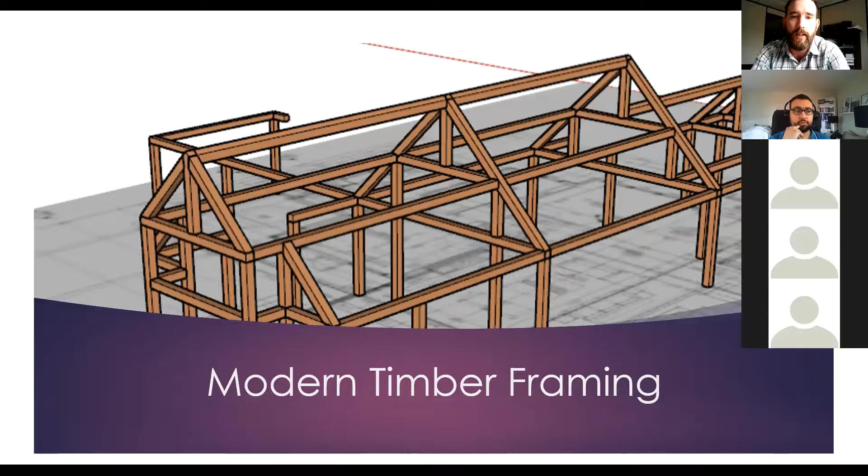I think wood is the material of the future. It was the material of the past, and it's going to come back for sure. Well, and it already has, which I'm sure you've studied a lot about. So here's one kind of an example project.

May I just add something? I was listening to one of the podcasts that is based from the US, and they were saying that part of the reason why the wood industry, one of the things hindering it, is the main manufacturers are based in BC in Canada, but I think they're starting a big manufacturing facility in Texas. So if that happens, the wood construction industry will probably grow in the US, which will eventually also kind of force the rest of Canada to embrace that change as well.

But anyhow, go ahead. Yeah, so definitely BC, that's where the big market is in Canada right now. They have all the trees. We're starting to see it come a little bit into Ontario. They just built a mass timber facility in Collingwood, I think it is. And then there's a couple in Quebec as well, because they're close to the forest. I think Eastern Ontario, Ottawa, Kingston, Cornwall, that region, we're prime because we're kind of right in the middle of the forest and the manufacturers.

So part of my goal is every project I get, I ask, hey, do you want to do mass timber? And most people say no because they don't know how much it's going to cost. But I am advocating for it in the area, and I'm starting to get people interested.

So on to traditional timber framing. I'm pretty lucky, there's a manufacturer in Brockville called Gibson's Timber Frame, and they do traditional timber framing. Everything's hand cut, mortise and tenon, and it creates really nice aesthetics. This area is still pretty rural, so there's a lot of people with cottages and high-end cottages. It's kind of like the Muskokas is all sold out, so people are starting to come here from Toronto, and this is definitely a bit of a premium product, but it's super nice as well.

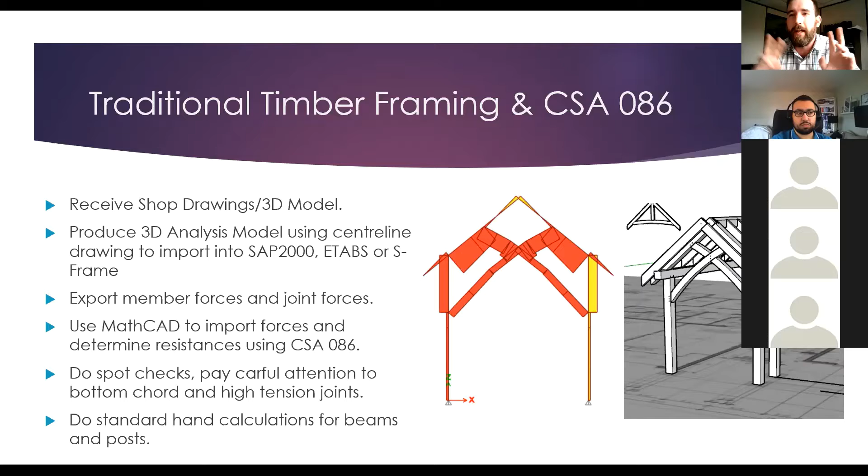And like all good engineers, I don't just blindly rely on any structural modeling I do. I definitely do some hand calcs as well, always doing a couple spot checks here and there, making sure it makes sense. If it's something simple like a post and beam, I'll just hand calc it and simply support it or something like that. By hand calculation, I mean I'm just typing it in MathCAD.

So here's a MathCAD sheet. I can't really do a show of hands, but is everybody familiar with MathCAD? I guess your professor used it a little bit, I think.

Anyway, my favorite thing about MathCAD is you can multiply like inches times centimeters and meters times feet, and it doesn't care. The units stay consistent. So you'll see my sheets switching back and forth from units all the time. I don't even know conversion factors anymore, and if a contractor gives me drawings in inches and I'd rather work in metric, it doesn't bother me. So I found a huge efficiency just not having to go back and forth with units, which you could probably imagine from an exam, that's definitely time consuming.

Also, you can copy and paste all your previous equations. This is kind of a snippet of one - I have a timber framing MathCAD sheet that every new project I get, I just pretty much copy and paste that sheet, which allows me to not have to retype out everything. So you probably recognize some of those equations.

Anyway, there's also a free version as well. If you haven't tried it, I definitely highly suggest you do try it, especially when you get into the workforce and need to make calculation briefs or something like that to get to your boss. This just keeps it all organized. They don't have to read your bad handwriting, and if there's a mistake, you don't have to rewrite everything out, you can just go back to the sheet and fix it.

So when I first got into this, I think it was because I'd rather work in metric, because that's kind of what you're taught in school. But my boss was all imperial, and it was just super frustrating going back and forth with him, because he didn't know what an MPA was and I didn't know what a PSI was. So I found this and I was like, yeah, of course there's a better way to do it. That's kind of how I came across MathCAD.

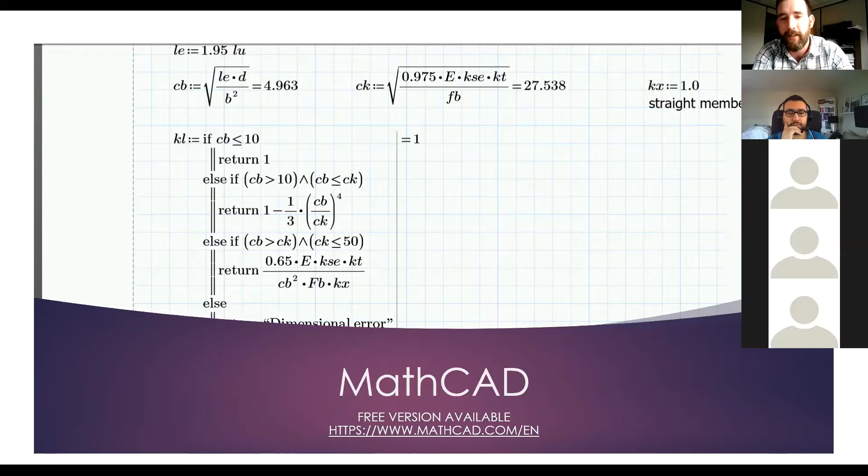So it's a great tool to use, and it produces great hand calcs as well. I wouldn't suggest getting into it if you're still in school, because like I said, I don't remember any of the conversion factors anymore. And if you're in the middle of an exam, you kind of need to remember those to do it fast, and I can't remember how to use my calculator anymore. So just be wary of that, it's definitely a post-school thing, I think.

So some of the interesting things, in school you don't really get into building code stuff too much. But the great thing about getting into timber framing as a structural engineer is it has to be engineered. In the building code, there's Part 9 for small buildings and then everything else. Small buildings are houses and buildings under 600 square meters, less than 3 stories, and these can be designed by a BCIN person, like an architectural designer. Now they're super limited in what they can do - they can only do 8-inch concrete foundation walls on 24-inch strip footings, and they can't have openings greater than 4 feet, this kind of stuff.

So what happens is if they have anything outside of their prescriptive requirements of Part 9, then they have to get an engineer involved. The nice thing about traditional timber framing is it's all post and beam style construction, so there's no light frame shear walls or anything like that. Anything with the post and beam style is not in Part 9, so then it has to be designed by an engineer.

So if this is something that interests you, it's a great industry to get into, and not a lot of engineers do it. I wouldn't call myself an expert in wood, but I get a lot of clients saying like, I guess I was working with my regular engineer and they don't know enough about wood to be able to design a truss, for example. And I'll tell them, yeah, I do that all the time. So that's great - I actually end up getting a lot of clients from other engineers because they're just not confident in wood, even though it's such an awesome, simple material.

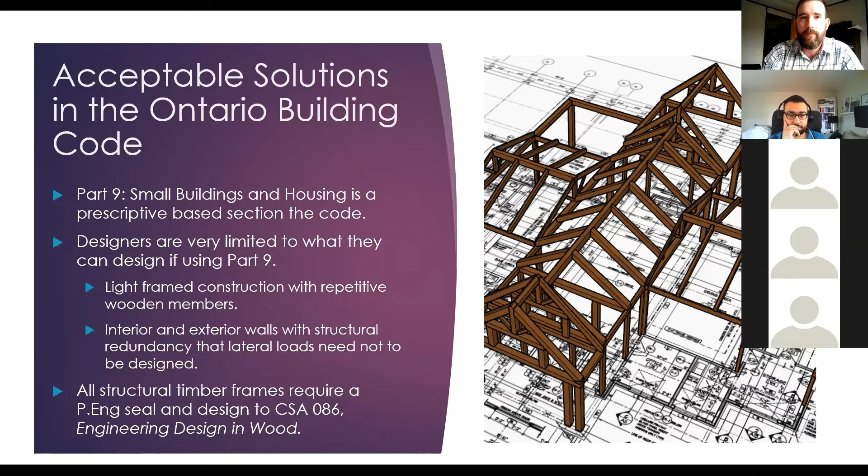So here's a good example project, also the one at the start of the presentation. This is in Brockville. It's a community building with a Zamboni garage, 2 change rooms, and a little canteen, beside an outdoor rink that they just put a roof over. I got involved with the project - they asked me to volunteer for it. I said okay, but if I volunteer, it's gonna have some kind of timber framing element. So that's what you see there, and it really is a beautiful building. If you're ever in downtown Brockville, stop by and take a look at it.

It's made from Eastern pine, which is not part of SPF - it's a northern species, so I'll get to that in a little bit. Most of the wood you can get locally in Ontario is all northern species, which, if you remember, is kind of the worst type of wood you can use. But in this case, the structure worked out.

The big thing is the tension load on the bottom chord of the truss, or a bent - a timber frame is called a bent, B-E-N-T. There's a lot of tension transferred through here, so there's actually hidden knife plates right across the middle, just to keep those tension forces. The one bad thing about using natural lumber is it's not very good in tension, because you get shear knockout at the bolts and pegs. So we have hidden knife plates with hidden bolts, and those are actually faux pegs, but it keeps that elegance of the wood look and everything.

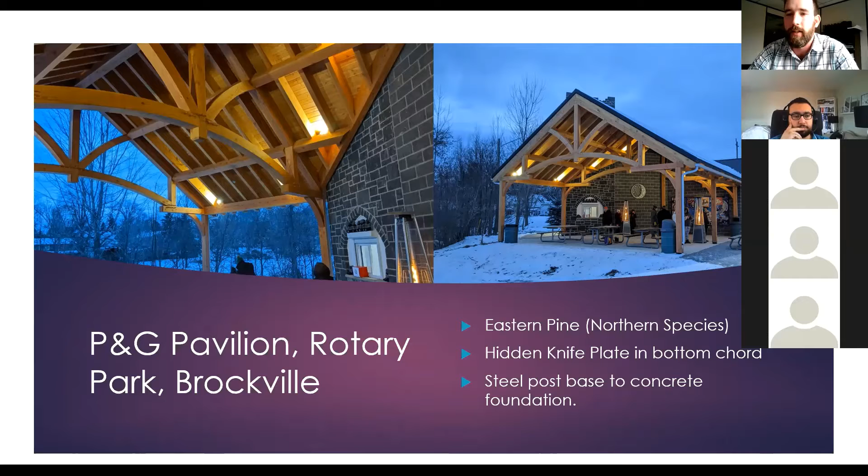Yeah, so normally, anytime you have a wood post on a concrete foundation, there's some kind of steel element there to separate the two, because the wood will suck up the moisture from the concrete and end up rotting quicker. You also want the post a little bit off the ground, so the post isn't sucking up water as if it's sitting in a puddle or something like that.

So historic timber buildings, there's a lot of these around. A lot of engineers don't like touching them for obvious reasons, and there's a lot of challenges to them from a structural engineering perspective.

So this is a building in Brockville. You can see someone signed it in 1891, I think, or 1814 even. So it's one of the older buildings in Brockville that's under renovation right now. I'm going through it with them, and they've got big plans. One of the worst parts about being an engineer is crushing people's dreams. Architects can be lofty and visionaries, but then the practicality of it is you go in there and say, well, if you do that, it's going to cost a lot of money. But anyways, that's some nice old wood framing there.

To use CSA O86 engineering design in wood, you have to use graded lumber with the correct species. I'm sure you went over that. All structural lumber has to be graded, except for a small portion of buildings that can be classified as farm buildings. But I even think they're kicking that out of the code because the National Farm Building Code isn't very good, so they're either updating it or just putting it under Part 9.

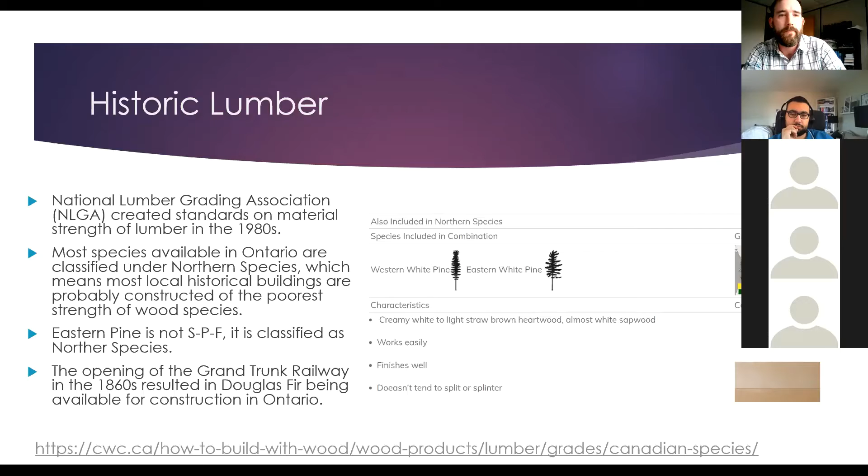Don't make that mistake, because there's quite a huge difference in strength values from northern species to SPF. So, renovating historic lumber buildings - as I mentioned, we can grandfather it. It's Part 11 of the building code, as long as you're not reducing the performance level, and there's a bunch of criteria on what happens when you reduce the performance level, like increasing loads or switching things around too much.

So when you go into an old building, most of the time you really can't do anything, or you're redoing everything. Unfortunately, there are no lumber graders that will do a site visit for you to grade that lumber so you can keep it in place, which I think is really difficult.

I've even, as a structural engineer, started looking around to see if I could find a way to get my lumber grading certificate so I could go on site, certify the lumber, and then design with it. But there's no field certification course - they're just focused on the manufacturing facilities, which is kind of bizarre. So I think there's an opportunity there somewhere for somebody.

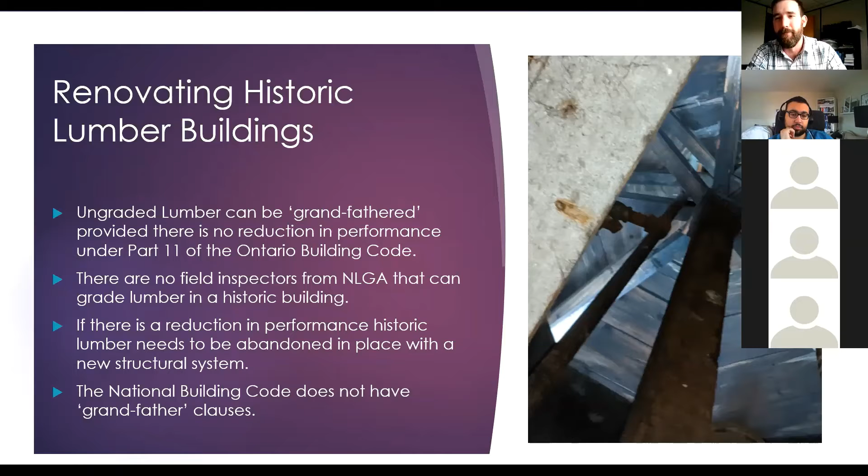If you do reduce the performance level in a historic timber building, that means you're just abandoning it in place and doing a brand new floor system, for example. And the funny thing is the National Building Code - if you're on a federal building, for example, it doesn't have any grandfather clauses. So theoretically, if you're renovating an old building, this is my understanding, I'm probably wrong, but you can't reuse anything, which I find really bizarre.

I mostly deal in the Ontario Building Code. So here's some future opportunities for some of you that want to study this further or come up with something - a field certification course for lumber graders. I had the thought at one point that we should start a structural engineering lumber grading association, or something like that, so we can deal with this issue on site. There's no reason why we can't go in there and grade the lumber visually, it's just that doesn't exist at this point in time.

It'd be nice if the CSA O86 provided provisions for ungraded lumber - what if we just made it more conservative or something like that? All these old lumber buildings are so over-designed anyways, and they're all true dimensional lumber - the joists aren't 1.5 inches by 7.5 inches, they're 2 inches by 8 inches. So I think there could be future studies done on a way to do that safely, and it'd be nice if 086 enabled engineers to complete that, so we can start saving more of these old buildings versus having to tear them down because the renovation costs are too high.

086 is also focused exclusively on softwood. It'd be neat if we could start getting some hardwood species in there and maybe a system to grade that. You'll never see a hardwood structural timber frame, for example, and it'd be really neat if we could. I know the American system has published values for hardwood species, but it's just not an acceptable solution in Canada yet.

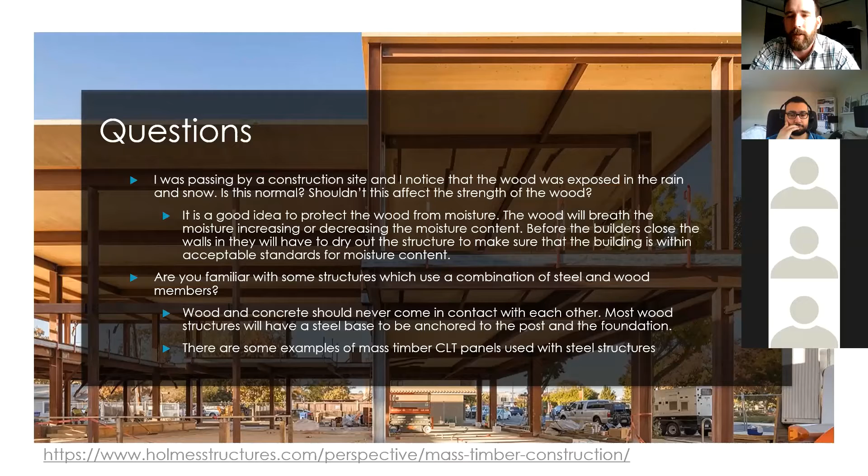Since you just talked about the pavilion, there was a question just now about if you had any measures put in place to deal with salt at the feet of the column in the pavilion project.

At the feet of the column, the posts are about 2 inches off the ground. There's a steel plate in there, kind of like a steel T plate, and then there's another plate underneath, so that raises the whole post up a few inches. That way, if there's any water or anything like that, it won't affect the wood. The steel plates are painted, so they're protected from rust. Did that answer your question?

I think so. Yeah. Okay.

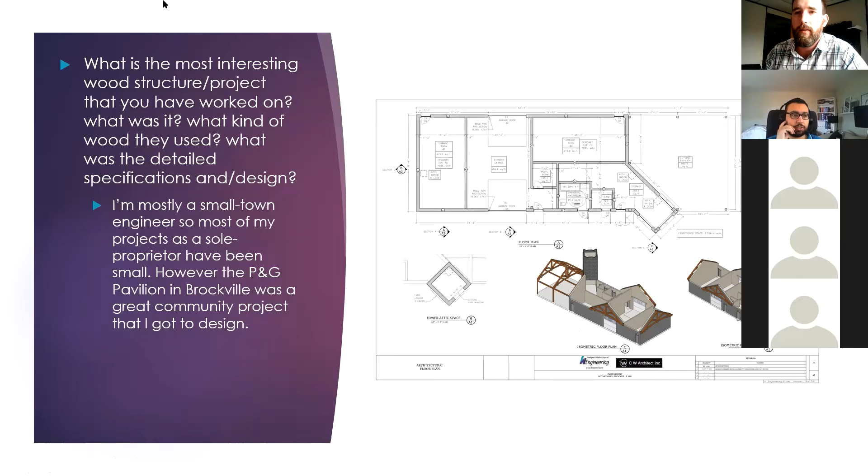So, what do you think the trends will be for the next 5 to 10 years? I think the industry is definitely going to go into this pre-manufactured route where all winter long Canadian companies can produce all the materials and then erect buildings in a couple months in the summertime, just because we have a limited construction season, and any way we can alleviate that, you're increasing the amount of construction you can do. And therefore, if you're a manufacturer or a builder, you're going to produce more money.

So as things head more into pre-manufacturing, that's a great opportunity for wood because it's adopted that pre-manufacturing model. For example, steel manufacturers will pre-manufacture the whole building, then you just erect it on site a few months later. Wood's doing that as well, and I definitely think that's the way it's going to go, especially modular design and pre-manufacturing, just to speed up construction time.

So I'm sure you studied it, but the Brock Commons building in BC, the first or tallest mass timber building for a little while, was built in something like 30 days, and it's 18 stories. Don't quote me on those numbers, you'll have to look it up, but it was built really fast.

And I think that's a great opportunity for the construction industry. So if you're newly graduated and you want to work in the wood industry, if you're open to moving, I think BC is probably the best place for you to go to find companies, because this is widely adopted in BC, Seattle, and the West Coast. There are a few local suppliers in Ontario and Quebec too: Element 5, Guardian Structures, and Nordic Structures.

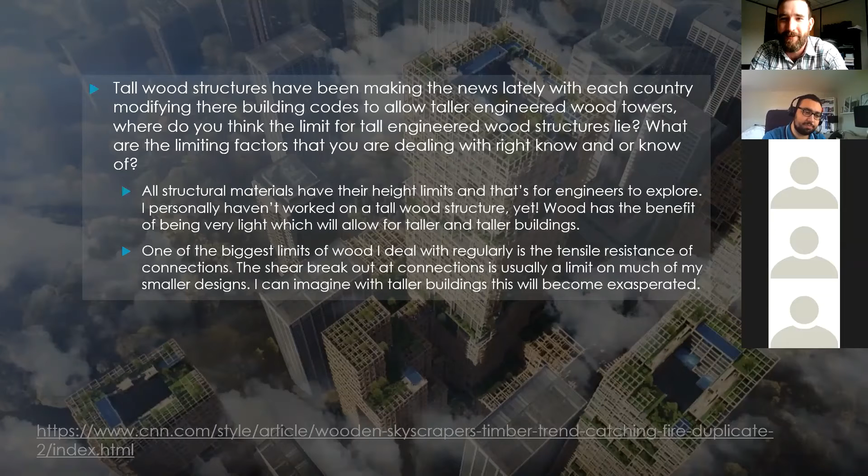How often do I reference the design manuals? They live on my desk permanently and I look at them every day. Here you can see my desk, the building codes here, and back there is all the design codes, the national building code. There's no way you can memorize it. So pretty much any project, if I'm doing a wood product, the CSA O86 code is right beside me. With MathCAD, I've programmed a lot of the code into the sheet, so I don't have to reference it too much, but there's always something to look up. So if you have a copy of the code, it's a good thing to have as you get into the workforce.

How much did your coursework help in your professional career? I think the biggest benefit was that while I was studying my master's, I was also working in a consulting environment, so I could apply what I learned in school to work and vice versa. I think it helped me understand engineering better, and honestly, I don't think I really knew how to engineer until I did my master's. So it's a good thing I did that program. The MEng program is 10 courses, and if you can get a bit of work experience first and then do the MEng with an appreciation for what you need to learn, it's a great combination.

When you get to the workforce, a lot of EITs start out in drafting. Unfortunately, you don't get a lot of experience on proper drafting standards using AutoCAD, so it's a bit of a painful experience. You know how to design a beam, but you don't know how to draw one. So if you're looking for a skill to brush up on, drafting is definitely a requirement, but most employers will let you learn along the way.

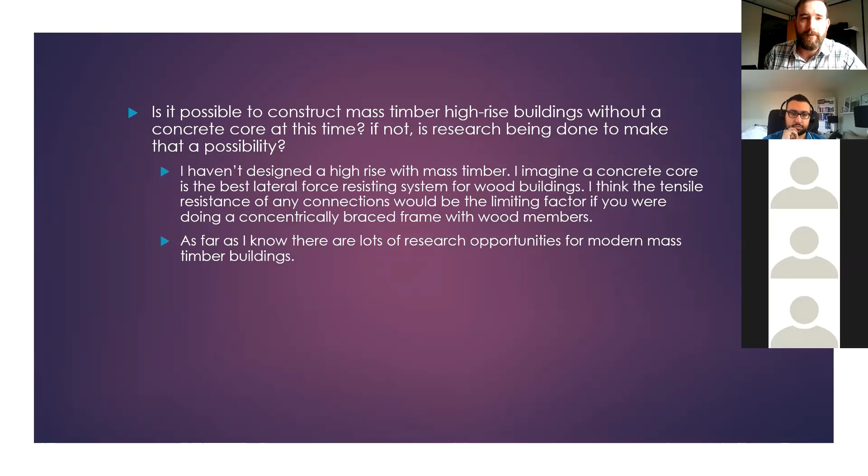Any issues applying for my license? Yeah, but the biggest issue was I had to mail my application in - I couldn't even fax it. I had to handwrite it out and mail it in. I think they're working on that now, it's not quite finished yet, but I found it really weird that the Professional Engineers Ontario, who are supposed to be on the leading edge of technology, had you snail mail your application in.

Anyway, for my license, as long as you're trained in Ontario at an accredited school and you get the right experience, it's a pretty good process. I would recommend writing the professional practice exam as soon as you get out of school, because a year later you forget how to be a student and how to study. So if you write it right away, you can still remember how to study and be a student, and then get into the workforce.

The big thing is getting the right experience. My first job out of university was at a construction project management company, and they'll only accept about 6 months of that, or maybe up to a year. You can't get your P.Eng if you're only doing project management. So if that's your goal, do a little bit of project management to start, but make sure whatever you're doing is acceptable experience.

How did I find the professional practice exam? I had this whole binder of past exams that other people I worked for passed down to me. I studied those - it's a 3-hour exam and I wrote it in an hour and a half. I didn't find it that challenging at all. It's a lot of legal stuff, but as an engineer, I think we're really good at finding patterns, and once you find the pattern, it's pretty easy to write.